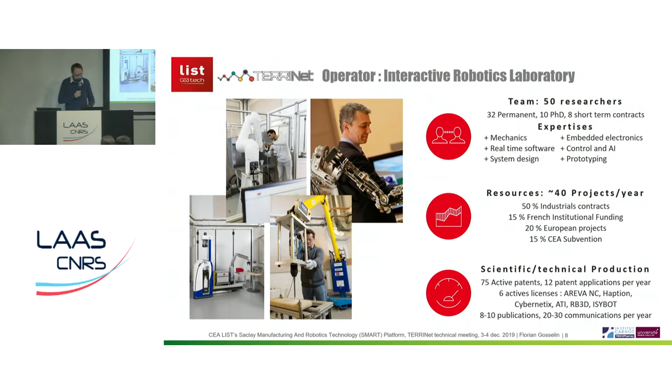So from a historical perspective, as we are part of CEA, we come from a nuclear context. For a long time, we developed systems dedicated to remote handling and manipulation of radioactive materials. In the 60s and 70s, we first developed mechanical systems. Then with the advent of robotics and computer science, we were able to separate master and slave arm and introduce some assistances, which allowed some use in real nuclear power plants. In La Hague, for example, we have some robots operating there. As you can see, it was a long time between research and development and use in real nuclear plants.

And then we were able to have some diversification in our applications, our systems being now utilized in several domains, with a focus for the future also on artificial intelligence and making our robots more and more autonomous.

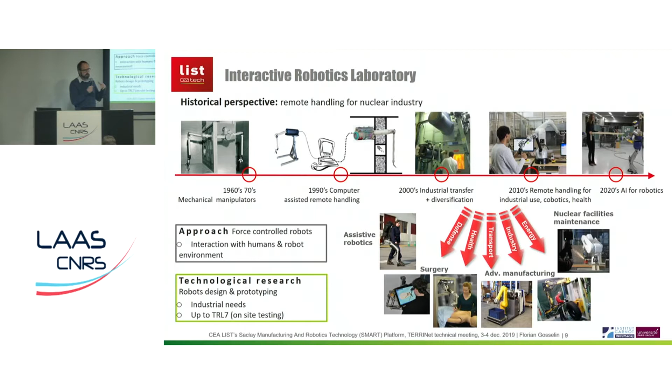One important point is that as we come from purely mechanical systems, most of our systems, almost all, are highly backdrivable. That means that we can make position control, of course, but also force control, impedance control without force sensors. Systems are sufficiently backdrivable to be able to have some force measurement and control using only the current flowing through the motors of the robots.

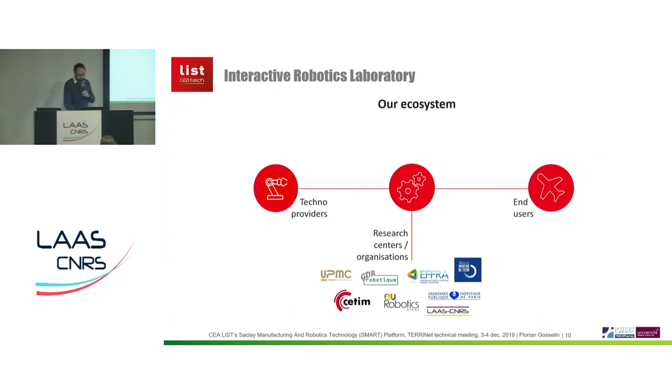Also, our ecosystem is composed of research centers and organizations, but also companies covering both end users, like large companies, car companies, Airbus, and so on. And what is important for us is to also have technological providers, which are the companies to which we can transfer our developments. For our robots, the basic idea is to develop some new systems, some new technology, either directly for some industrial customers or within some collaborative projects. These systems are dedicated to fulfill the requirements of the end users, but we need techno providers in order to be able to industrialize our robots and sell these robots to the end users.

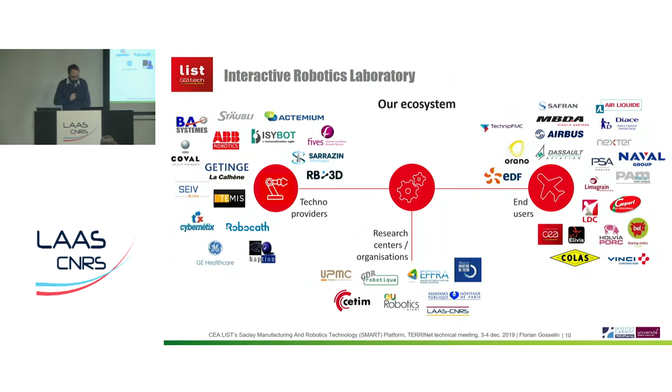the PSA factory. We have another platform which is Clinatec in Grenoble, which is dedicated to medical assistance with development of exoskeletons and BCI controlled systems. We have another platform in Nantes with mostly virtual reality simulation tools in order to be able to test some assistances. And another platform in Bordeaux, which is dedicated to telerobotics, plus a new one in Cadarache for ITER, which is an international fusion reactor located in Cadarache, and for which we want to develop maintenance robotics. All these platforms offer physical infrastructures with robots and sensors and so on, but also some software framework and network infrastructure.

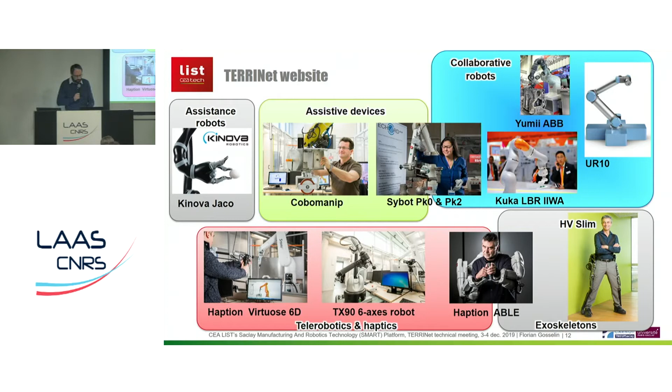Now, coming back to TERRINet. On the website, we described some systems. This is a snapshot of the TERRINet website. What we can see is that we propose assistive devices, collaborative robots, telerobotics and haptics and exoskeleton solutions. What I wanted to tell you is that some of these systems are already provided by companies, so these are industrial products. Some others are prototypes. Some are still functional. Some others are historical developments. And I think it is important to give you a better picture of what is really usable and what can be offered to visitors.

So first of all, what we can offer is a force feedback remote handling system, which is available in Saclay on the Smart platform. It's composed of a Haption Virtuose master arm, 6 degrees of freedom, with a range of motion of the arm of about 1 meter. It allows to control remotely different kinds of robots, one of them being the Stäubli TX90. In order to be able to couple both robots together, we use the Cortex software, which was developed by CEA.

It's the last generation of computer-assisted téléopération controller. TAO is téléopération assistée par ordinateur, computer-assisted teleoperation, computer-assisted remote handling. It allows to use any kind of master arm, any kind of slave arm with Cartesian space coupling, with possible force or position amplification or reduction, and some clutching functions. And it's associated with SCORE, which is a supervision tool in which you have a digital twin of the robot and environment, in which you can implement virtual guides, which are trajectories you are forced to follow, generated by a virtual mechanism, or you can implement repulsive areas in order to avoid entering some dangerous zones or avoid damaging the environment.

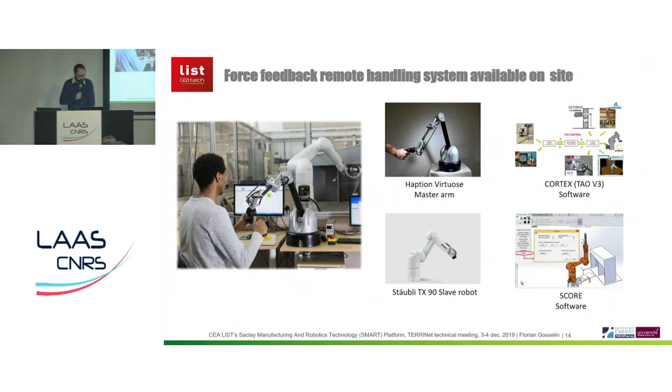So the Stäubli can be controlled in teleoperation. It can also be used as a standalone system. We have also an ABB robot, and these are commercial systems. And we developed within a European project, ROMANS, a 3 finger gripper. It's underactuated with 4 motors and I think 9 or 10 degrees of freedom. It's quite a large system, allowing to grasp objects of about the size of my forearm.

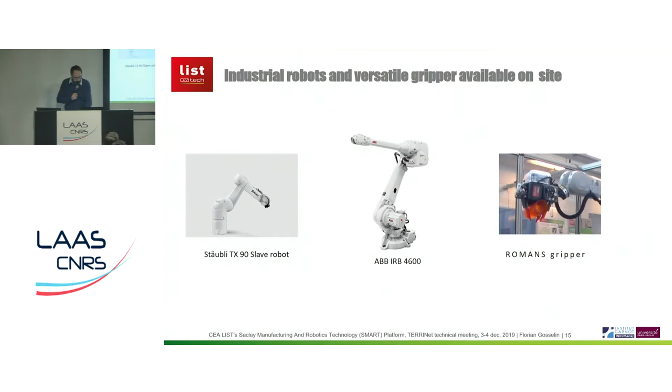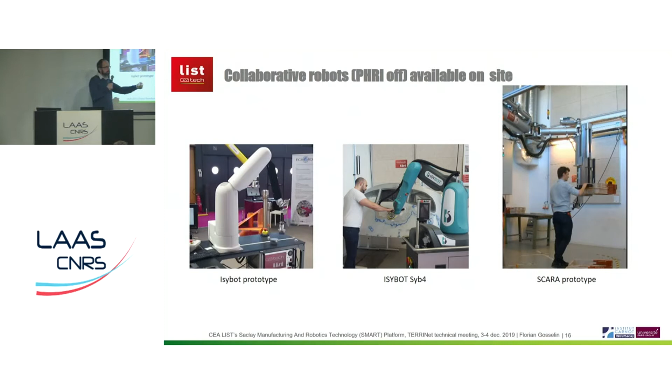We have also a big SCARA robot, which was developed to carry heavy boxes in the agro-food industry. So the range of motion is several meters, and the capability about 60 to 80 kilograms. It's a force amplification system that you can program also by demonstration in order to displace these boxes automatically.

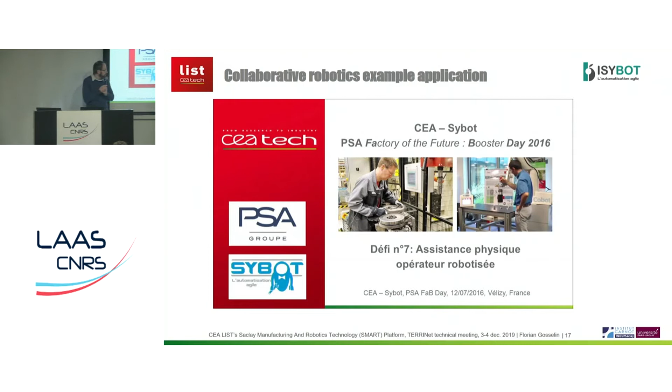These are videos. I will perhaps skip part of them. So they don't run. So it was examples of use of the collaborative robots. Perhaps this one will work. I don't know.

So it doesn't run. So it was an illustration of the use of these robots for sanding and polishing operations on cars, trains, and so on, which are at the heart of the business model of ISYBOT. Regarding cobotics, we have several systems also, some of them being still operational, some of them being historical and no more operational, some of them being in between.

So regarding force amplification systems, we developed in the past this robot with company RB3D. It's a system that was developed, for example, for the foundry industries, in order to help operators carry heavy tools that vibrate a lot or that produce large forces and that are difficult to manipulate. This category covers systems that are in permanent contact with the user in order to amplify the user's force or to guide his movements. And so we have force amplification systems, intelligent manipulators, and also exoskeletons falling within this category.

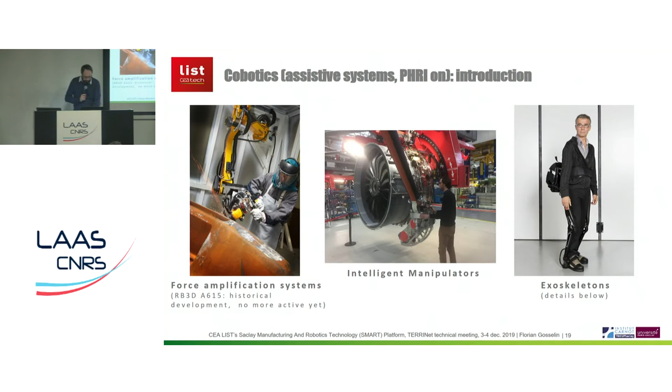Regarding intelligent manipulators, we have this CoboManip system, which is a robot that was developed for tool handling assistance. It's available on the smart platform. This part is about the size of a man. You can see it here. It's slightly larger than on these pictures. So the workspace of the robot is 5 to 6 meters in the horizontal direction, and it can lift objects up to 120 kilograms.

The idea is to allow manipulating heavy objects as if these objects were in a zero gravity area, and also with some assistances based on virtual guides and protective areas in order to protect the environment. This robot is coupled to a digital twin in order to be able to implement some of these functionalities.

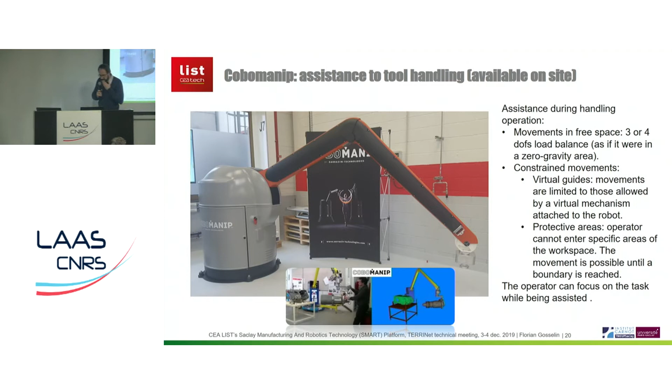And finally, regarding exoskeletons, we have different kinds of exoskeletons that were developed in the laboratory, some of them for lower limbs, some for upper limbs. Regarding the legs, this is Exoslim, which is a prototype under development. It was emphasized on the website, but it's still not fully operational. With RB3D, we also developed more operational systems that are now sold, but which are very simplified compared to exoskeletons. These are very dedicated systems in order to help operators make a particular task on site.

This was developed for the construction domain and road construction. And regarding the upper limb, we developed some systems for the arm. Able system is now sold by Haption. We have one such system, which is the first prototype. It's still operational. It can be used at CEA. And we also worked in the past on hand exoskeletons, which are unfortunately not fully operational as these prototypes were developed within collaborative projects which are no more funded, so we don't have sufficient money to keep them operational for a long time.

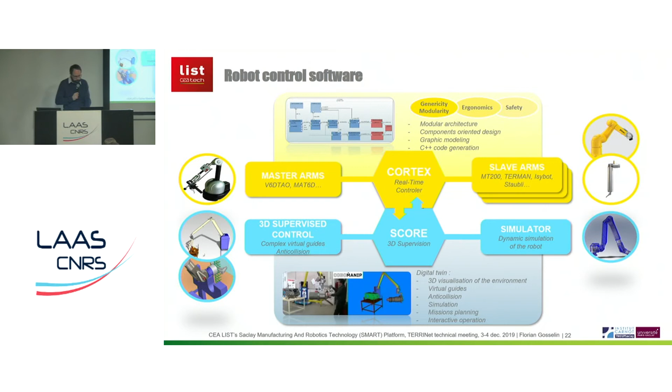And SCORE also allows implementing programming by demonstration functionalities, and programming also using the digital twin or the real system with some visual servoing.

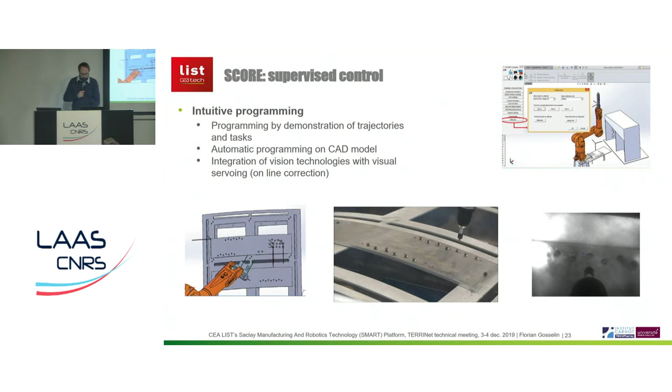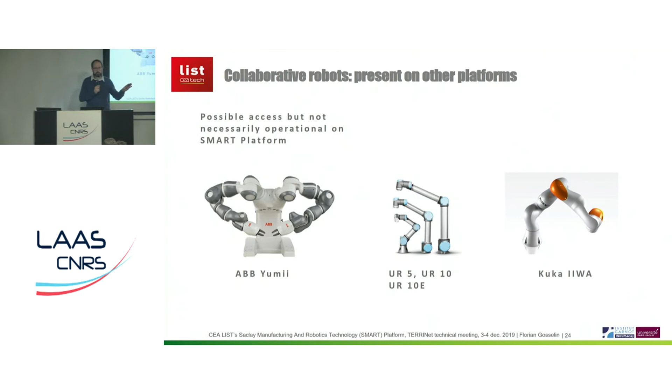Yes, in fact we try to answer the needs of industries, but one of our missions is to support first French industries, then European industries, and world industry. So this is the order in our mission, the order that we have to respect. Still, we have some requirements from US companies, Asian or European. It depends.

You have so many machines that are close to the needs of industry in many applications. I don't know, Rosella, do you remember how many applications there were to CEA, from the beginning? I believe two applications. Users accessing CEA. I don't remember if there were more applications that were then rejected, but for sure at least two users, coming not necessarily from industry, do you remember now?